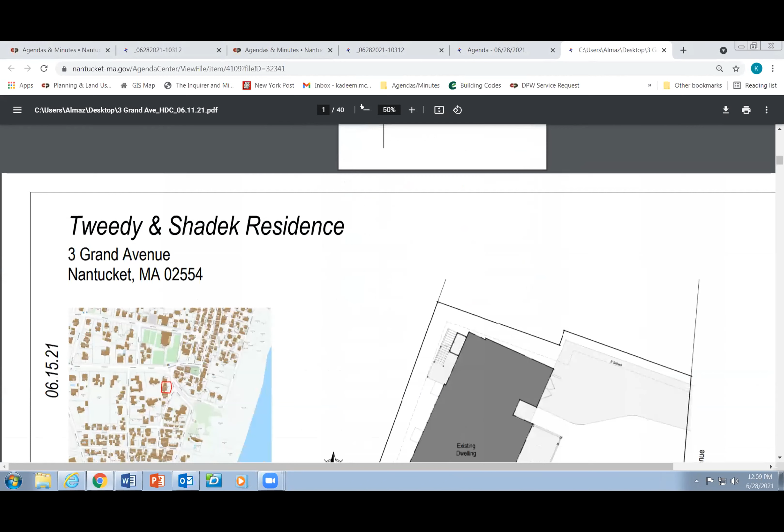Cool, so this is an addition to 3 Grand Ave. I'm sure you're familiar with the site and the location of the structure. Based on the available historic documentation, this structure is supposed to be formerly part of the Ocean View Hotel, and it was a portion of the hotel that was relocated from an adjacent parcel.

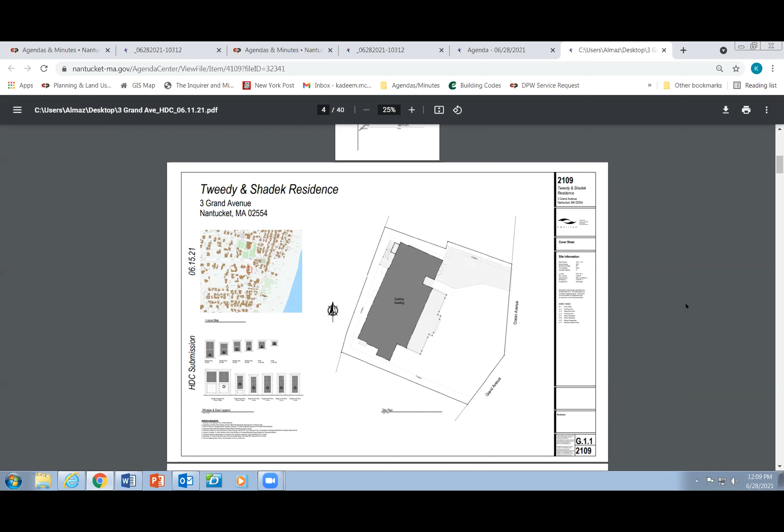So basically, we're not planning to lift the building or move it, or do any significant additions to the building footprint, but more kind of clean up what's there, try to get a more cohesive architectural language where we can. And we are proposing to basically add some dormers and a roof walk.

There was a roof walk that was previously approved a few times actually in the past. There is some historic documentation that we've provided. It's, again, the building's not entirely recognizable from its original inception.

It previously had a cross gable on what we're now calling the east and the west elevations, and had a lot more ornamentation on it in its original incarnation when it was part of the Ocean View Hotel. There's some great photographs online of it.

Again, we can't really figure out why or what the story was with the omission of the cross gable on both what we're now calling the east and the west elevations. A lot of times I can see elements like the wraparound porch going away when it was moved, but the removal of a cross gable seems like a fairly invasive change, and we don't really have any documentation in terms of when that occurred.

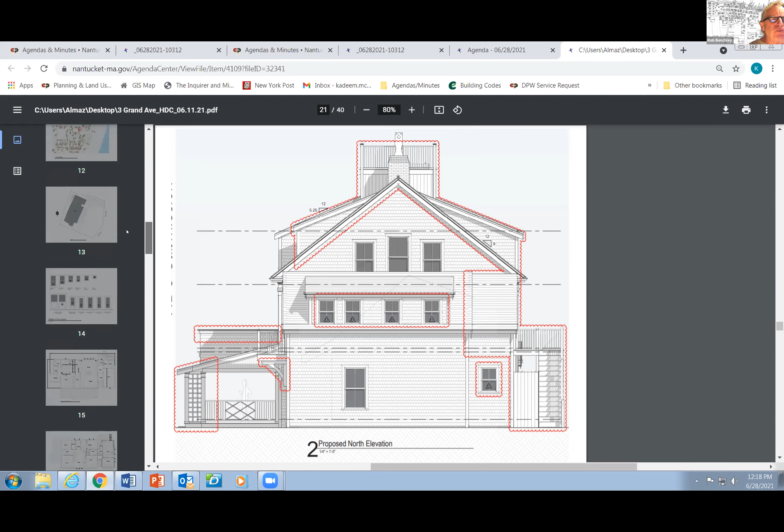It's Rob. I just have a question on the exterior stairway on the west elevation. I don't see where that... oh, right, I see it now. Okay, gotcha. All set.

I thought it was on the main mass of the house from looking at one of the north and south elevations. Okay, great.

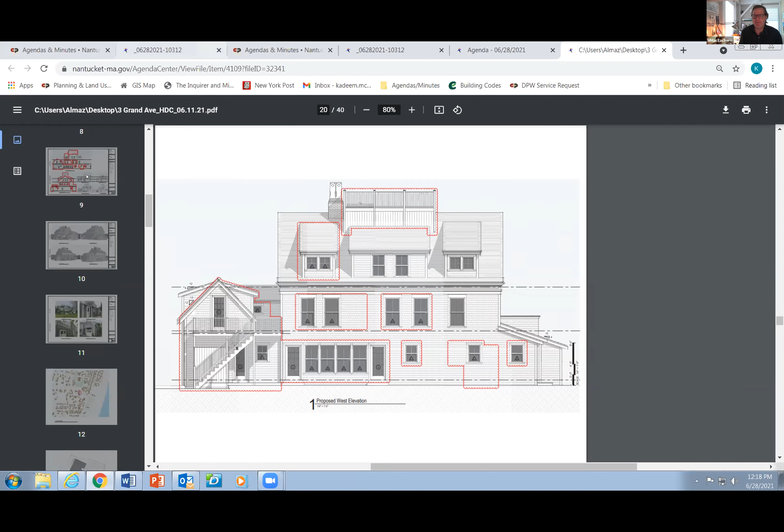And I think we have some perspectives in that packet - Kadeem, I don't know, like one of the earlier sheets. Yeah, there you go, sheet 10. All right. Oh, okay, how's that? I think the ones that show the front elevation, the north, upper left-hand corner - just give me a second.

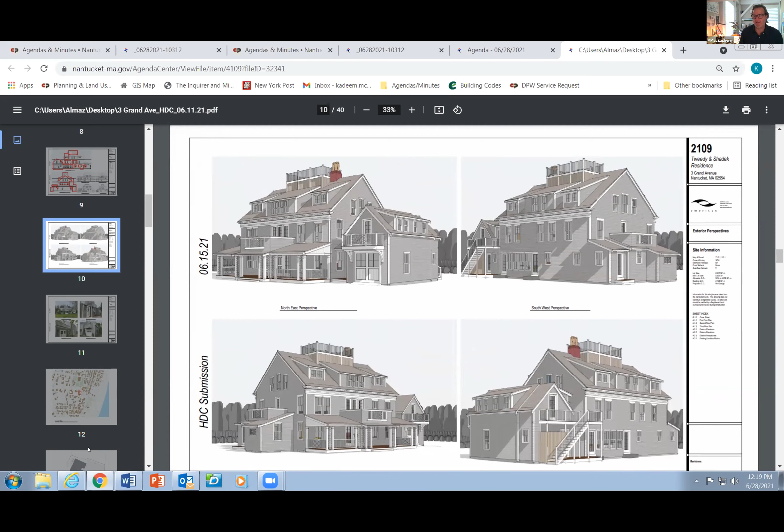Just try to basically clean it up, keep a lot of the existing details, and celebrate the structure. And there's some really beautiful photographs.

There's also the Ocean View Annex. I don't know if anyone's ever seen those photographs. Yes, they're quite something. Oh, I think they're further down on that.

There was an outbuilding that was part of the hotel that was called the Annex, and it was 4 stories tall, and ornate, and really a pretty well-built beast. I'll collect those and shoot them out to everyone.

Just not part of any submission. We'll make it part of the submission, but I think everybody would find them really interesting. Got it - it's a separate building.

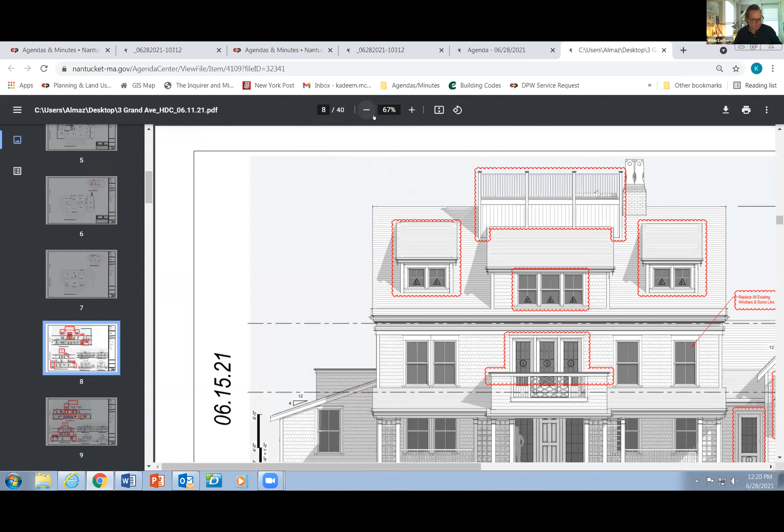This is Rob. My initial thoughts on this were, I like the way this sort of goes with the other former hotels in Sconset, the Atlantic House being one of them, and also the Sconset Inn, also known as now the Summer House.

Where they've put dormers back on according to the original construction. And I think that this kind of acknowledges that 1880s history of Sconset, with it leaning back towards looking like an old hotel. So those are my thoughts.

Anybody else? Well, this is Clement. I'll just pipe in and say, I don't like the Widow's Walk. It just bulks everything up to me, but I like the extra dormers - I like the 3 dormers. I like the porches, back stairs, all that looks fine. I know you said it's been approved 3 times or whatever, but it just masses it up to me, the Widow's Walk.

Thank you, Clement, actually I forgot to say that too. But anyway, this is Angus - there's a lot going on here. Seeing the old photos, it really makes me want to see the old building.